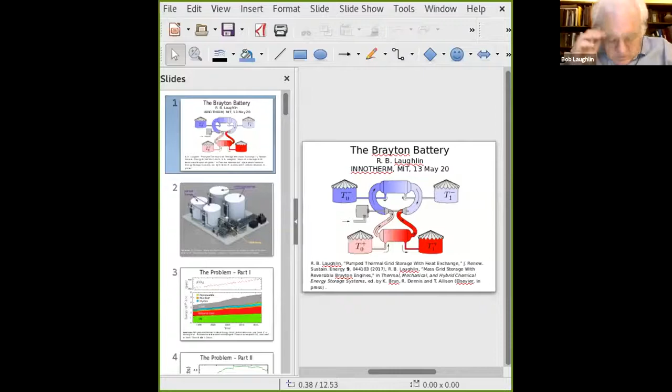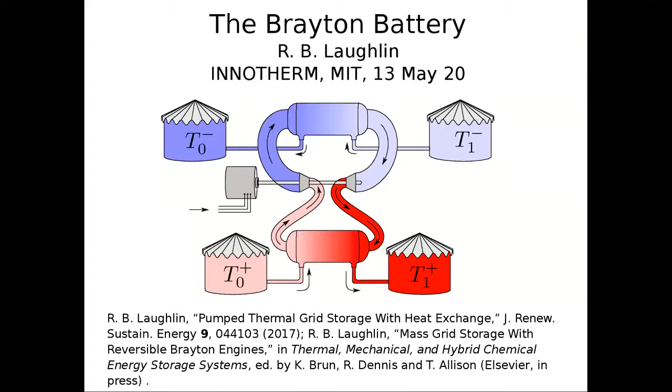Okay. So we're sharing here. Share. Okay, have we got signal? My own voice is not coming to me. So, Craig, you can communicate with me with hand signal. I can hear you. Yes. Okay. Yeah, we can hear you fine, Bob. I can't hear myself. Okay, great.

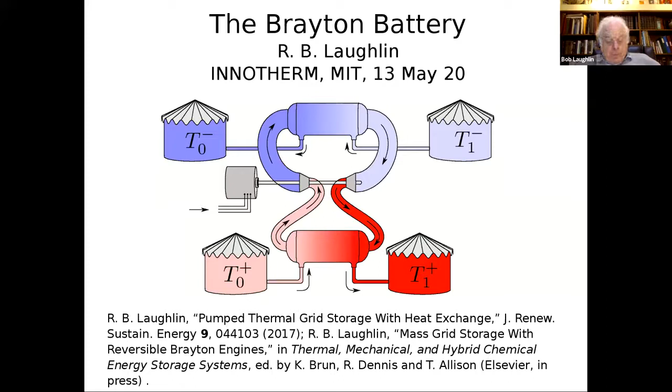So I'm going to talk to you about technological things having to do with how to store energy on the grid cheaply in enough mass to have an effect on the economics of wind. This little item is an example of what it might look like. This is drawn courtesy of Brayton Energy LLC up in New Hampshire. I don't want to talk a great deal about it other than to say first that this picture came out in 2017, which is not an accident.

And also you'll see that yellow thing says heat pump. That's the engine. And this particular version of the engine is bigger than it ought to be. So the actual engine that's doing the conversion of the energy is actually very small and is separate from whatever is storing the energy. And that separation between the engine and the storage medium is actually critical for the economics.

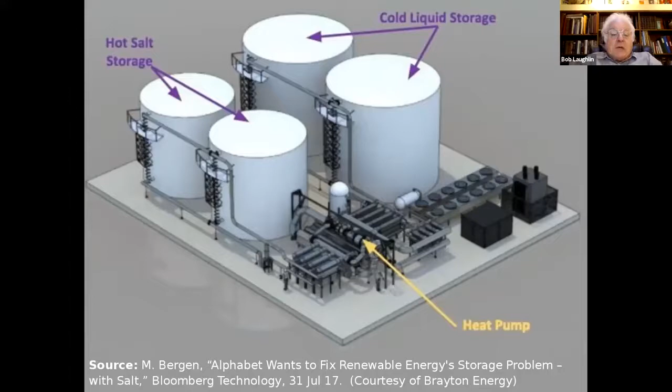Now, let's begin by talking about what I call the problem. I'd like everybody to look at the bottom figure. That is the world energy budget in joules per year as a function of time from the BP statistical review. This is converted from tons of oil equivalent by the usual factor. Here, the key things to note are first, that the total growth is monotonically upwards. Secondly, the total renewable budget is that little yellow sliver there. That's all of wind and sun. Now, plus, it turns out it also includes corn ethanol.

And that's important because the energy economics of corn ethanol is very problematic because of the diesel used in growing the corn. So actually the renewable situation is even worse than that yellow sliver shows. The renewables are growing very rapidly, about 2/3 of that yellow, but the fossil consumption is growing faster. And the total growth in the coal, natural gas, and oil actually exceeds the advances in renewable energy.

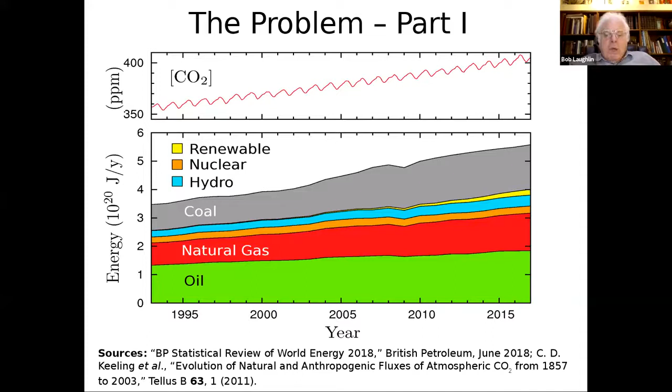So that means the Keeling curve is missing about half the carbon budget out of the Earth, and presumably that's going into the oceans, although you don't have direct proof of that. All right, so that's the energy carbon situation.

Now, we get to electricity, wind, and this is what I call the problem part 2. This is a plot of the power budget of the state of California, the California ISO, as a function of time over 24 hours on some day in 2009. What you see here are 3 curves. The gray curve down there is a prediction made 3 days ahead of what the demand will be. The red curve is a snapshot of what the demand is in real time. You see it matches the curve pretty well. And then the green curve at the top is reserves.

So the reality of electricity today is that electricity travels at the speed of light and is not storable. So power companies make their business by anticipating what demand will be and then switching on generation assets onto the grid in time to meet that demand. And that's so sensitive that they have to have extra on hand just in case their theory's wrong.

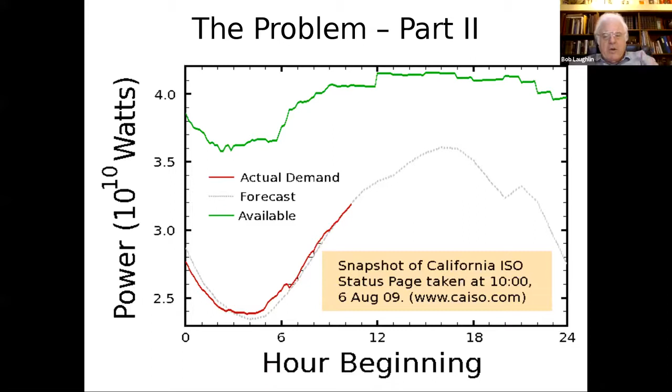Notice the magnitude of the slosh there is about 30%. Call it 50. Okay, so it's because of where 0 is on the y-axis. So what I call the diurnal surge is about 50% for the electric grid between low use in the early morning and high use at rush hour.

As a result, wind assets often have negative value. This has happened in numerous parts of the world, West Texas, parts of Europe, definitely in China. The wind energy comes when it wants, and the fundamental problem here is that the power industry is all based on time. Power that comes when you don't need it is useless to the industry because the industry is busy switching on assets to balance the load.

So negative value means that the power is worthless. It's worse than worthless. You have to pay the grid to take your power. So this is telling you that there's a business problem that's fundamental and has at its root the physical reality that electricity can't be stored.

Now you say, well, why not store it? Okay, there's a really interesting fact about the United States, which is that it has a huge amount of pumped hydro storage available, particularly in the Appalachians. And these are 2007 numbers. The amount of pumped hydro storage that you have down at the bottom, that red 0.25, is 1/4 of the amount you would need to level the entire diurnal surge load of the country.

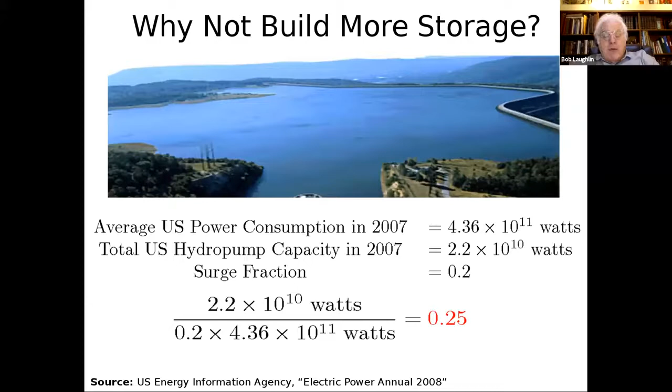So this was built chiefly in the 70s and 80s, and you might ask, well, why not build more? Clearly, if you build 1/4 of it, you could build the rest. Well, that's part of the story. One reason, the lesser important reason, is that there's a danger factor. This is a picture of the famous Taum Sauk breach, where, well, I think the picture is self-explanatory. The reservoir failed, and there was massive destruction downstream of it.

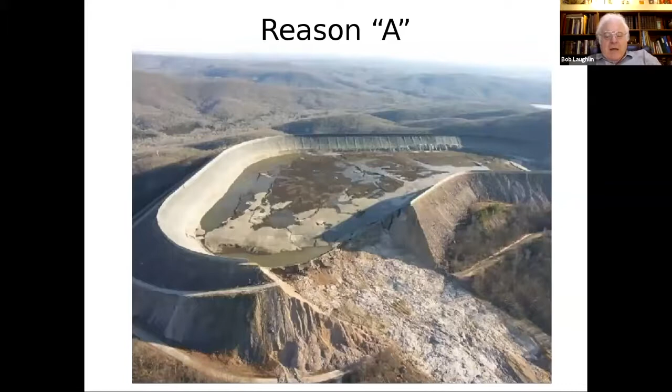But the more important lesson is that the amount of energy we are talking about storing up the surge for a metropolitan area is an immense amount of energy. It's equivalent to a really hefty sized nuclear bomb. So when you're thinking about energy storage as a safety issue, it must be physically impossible for all that energy to come out at once, or you risk destroying the city. So for example, storing all that energy in compressed air above the ground is kind of a non-starter. All it would take is one terrorist bazooka round lobbed into the middle of the tank farm and no more city.

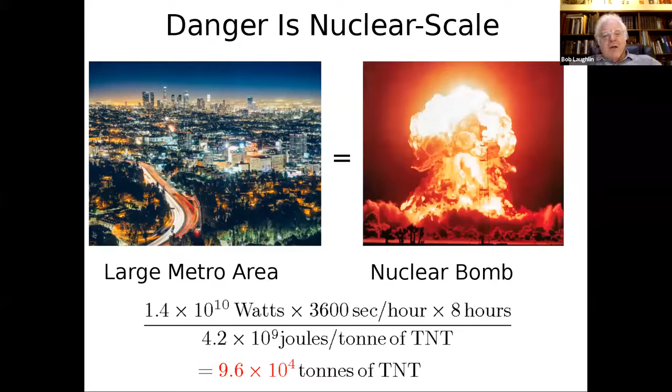The much more relevant reason is this. In the late 1980s, aeroderivative gas turbines got to be very, very good. And the power industry discovered that it could handle that surge much more readily by buying cheap simple cycle gas turbine generators, and just switching them in and out of the grid as the needs of the load required. And this is the way it's done today.

So when this technology came on board, construction of pumped hydro stopped. In other words, what stopped the construction of the remaining 3/4 of the pumped hydro that you would need to level the load is economics. Basically, the gas turbines are cheaper, and there was no hassle with the government over land, no water to deal with, and they're faster. So there's a technical/cost issue right at the breaking point of where power companies make their profits.

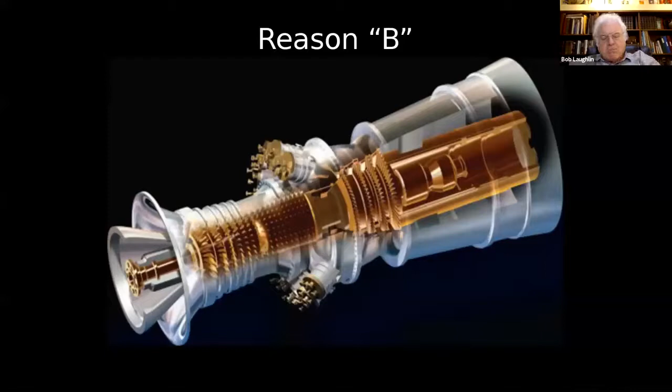Now, let's talk very specifically about those profits. Look at the bottom. This is a plot, again, for the California ISO of the total power, basically of all of California versus time over 24 hours, broken up into components. This is for a particular day. It turns out it's the 1st of April, 2019, but it doesn't matter. It typically looks this way every day.

And what you'll notice is that big yellow bulge down at the bottom, which is basically the solar fields from the Mojave. And you'll see that it's a big hunk of power. It's about 10 gigawatts. Just to put that in perspective, the average power needed by 5-county LA Metro is about 14 gigawatts. So it's a lot of power, and you'll see it rises up while the sun is shining and then dies down during the day. And then the total power use at the top, you'll see, peaks way later. It's peaking about 2000.

On this particular day, the various power utilities balance the load with the red, which is gas turbines, plus hydro imports from the Pacific Northwest. So out in California, we're near enough to Washington that we can use power lines to bring down power from Bonneville, and that's dispatchable. And the gas turbines are dispatchable. So while that's the case, you can balance the load with those things.

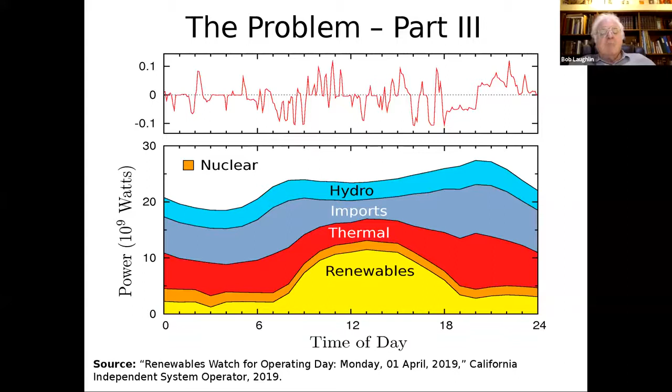Now, in order to identify this time scale, we have to go into the twilight zone. And what I mean by this is to deal with prices. And the problem there, of course, is that pricing has to do with human behavior, and you don't actually know what costs and prices are until you're in business selling things. So these numbers have very large error bars, and we could argue about them, but I have to put something, so I'm going to put these numbers.

So here we have cost in dollars per watt for the storage as a function of how many hours of storage you got. Okay? You notice right away, my thing, which I'm talking about today, is red, and it's the best. Why is that so? Because this is my graph, and I get to make whatever I want best. Now, I'll try to justify it, of course, but there's obviously a conflict of interest with regard to the red line. What I want you to look at first is the blue line.

The energy storage has two metrics. One metric is the total cost of the engine. That is to say, in the case of pumped hydro, it's the cost of the dam and the generators and the turbines. That's a fixed cost, and it doesn't depend on how much energy you store. The amount of energy you store depends on the size of the lake. And the lake can kind of expand, and there's land cost for that, but it's actually very small.

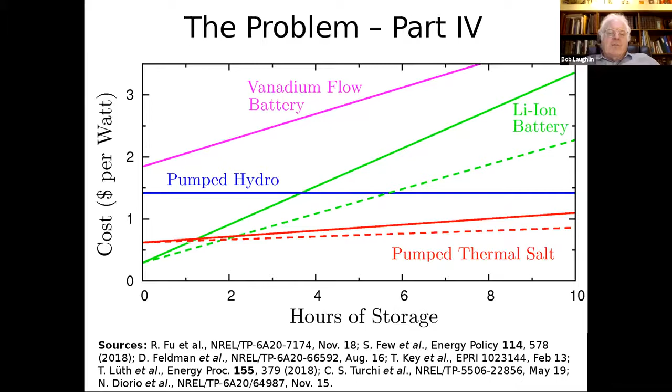Now, there's a flow battery curve up there. Flow batteries and pumped thermal storage are similar conceptually. For now, I'd like to not go down the flow battery avenue—let's just say they have cost problems having to do with the electrodes, the electrolyte, the acids, and the particular ions you're using in them and so forth. So flow batteries are a great idea, but they're kind of not ready for prime time cost-wise.

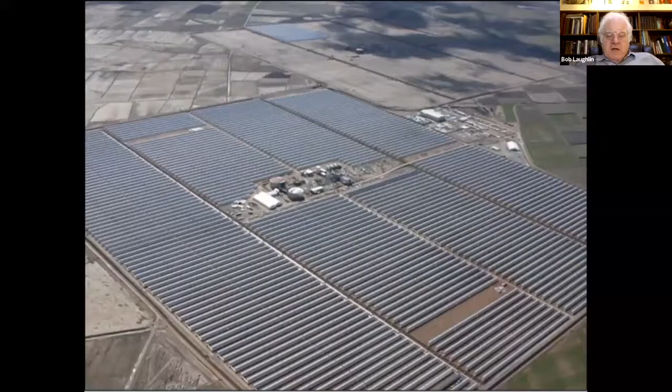Here's a close-up of it. Focus in on the center, and in particular those two brown tanks. The center is where the engine is for this solar farm. And there it is—you see in the background parabolic reflector collectors, and in the foreground there are two tanks.

These tanks are filled with molten nitrate eutectic, where heat is stored. Andasol 1 was the first commercial plant that stored energy in the form of heat, collected from parabolic fields, in molten salt. Now, this was not the first deployment of molten salt storage—that first deployment was at Solar 2 in Barstow, California, but this was the first commercial one.

And because it was commercial, there was a lot of buzz in the finance markets about what the costs were. Because of this buzz, you can go back and verify that the costs were actually remarkably reasonable. The fact that the plant was built also proves this, but let's just say there's more evidence than that, just because this was the first.

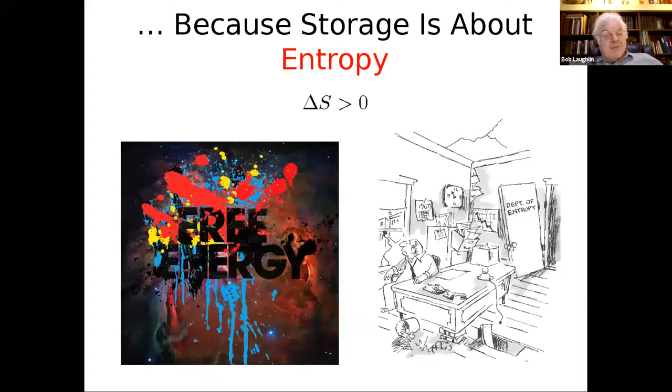Now, the key observation here is that modern gas turbine technology has become very good, and gas turbines are basically just a bunch of fans. Disregarding the burning of fuel for a moment, the actual compression and expansion that occurs in modern gas turbines is very, very efficient. They make shockingly little entropy.

And therefore, you can imagine running them backwards. Now, this is running them backwards figuratively. There are blade shape issues that you have to worry about, which I'll come back to later. But insofar as there isn't any entropy being made, you can simply run the movie backwards. So you're producing energy, you stop the projector, run it backwards, and you're storing.

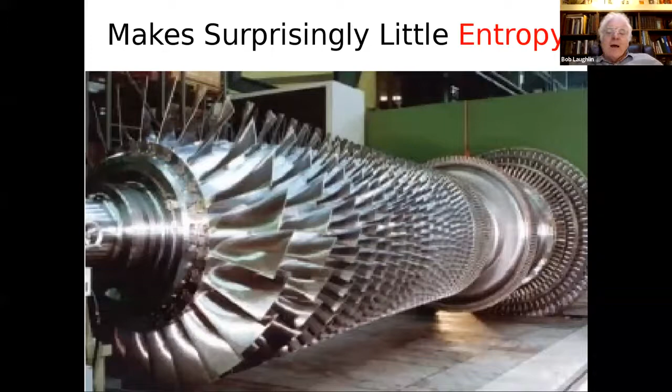Now, let me remind everybody about a few basics of gas turbines. So here you've got a jet engine, some air is coming in, there's some fire, and air is going out, and you get power out. Then you ask the question, well, how come energy is coming out? What's the difference between the compressor and the turbine? Turns out very few physicists know the answer to this, so I'll tell you.

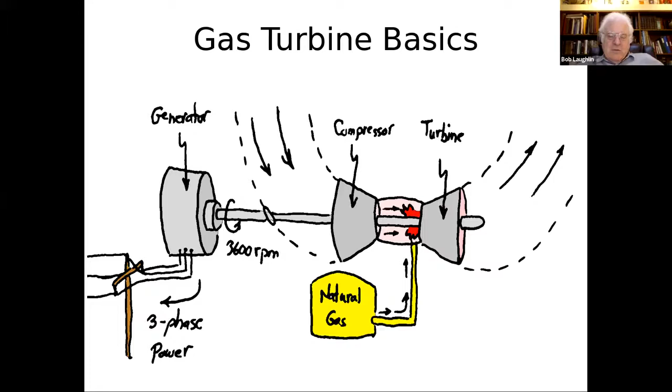It's the temperature difference. The key trick is that the temperature is much hotter at one end of the chamber than the other, and the work done in the turbo machinery is P dV. It's the dV, the volume is different on the two sides. So the trick is you keep the temperature unbalanced, and then maintain that temperature imbalance with a stupendous flow of moles of gas through the turbine.

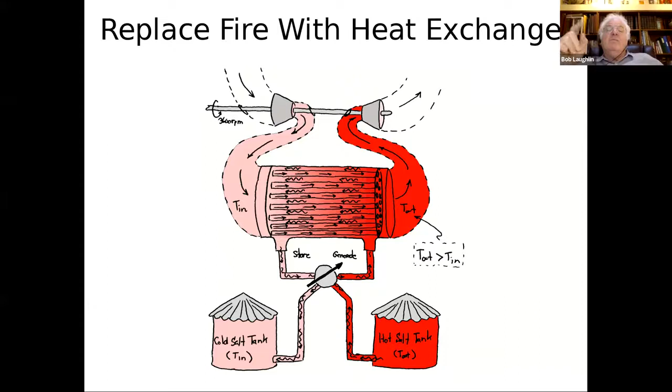Now let's advance a little bit and get rid of that, and put instead the moral equivalent of a locomotive boiler in there, then do exchange with some sort of heat fluid. As far as the turbines are concerned, nothing has changed, they work exactly the same way. But now you have heat being transferred inside a heat exchanger such that the temperature difference over which it's transferred is very small. And if you do that properly, you can cause the amount of entropy made to be very small.

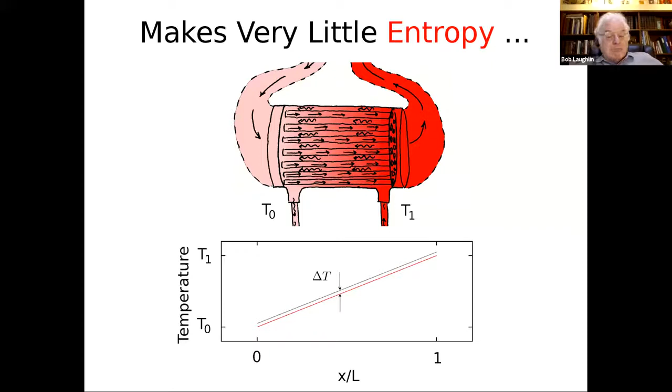So now here's the engine. Let's just do it twice, copy it, have a high pressure side and a low pressure side. So we're doing the same thing a gas turbine does, but now it's all done with external combustion, but it's not combustion at all. It's just stashing of heat in heat media.

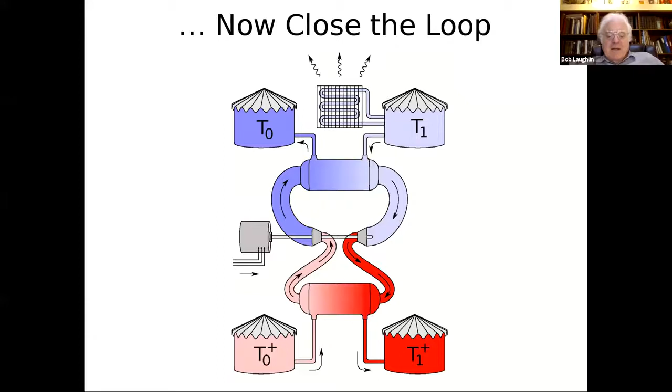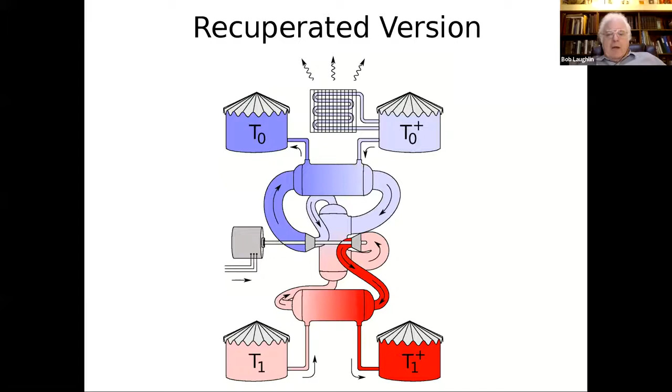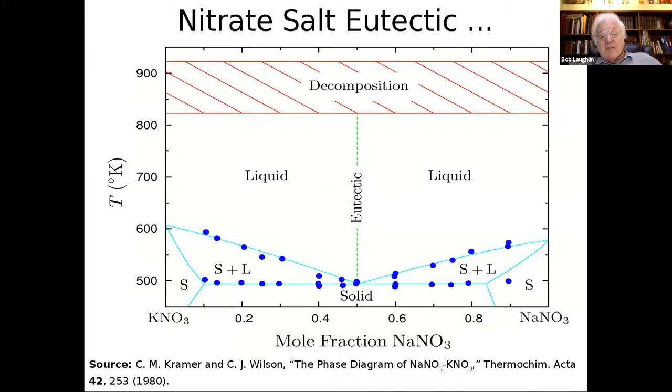And it turns out that temperature range is large enough that phase transitions don't matter. In other words, equipartition is guaranteeing that the amount of heat stored per atom is very large. In fact, you don't want phase transitions to occur here because they're entropy makers. So this is an application where phase transitions in the medium would actually be bad.

This temperature range turns out to coincide exactly with what's called the creep cliff of the steels in question. This means there's a fundamental compatibility with the engines. This compatibility is also manifested in modern day supercritical steam plants, which is why they have the temperature ranges they do. So the temperature scales of these salts turn out to be just perfectly adjusted for cheapness and compatibility with materials.

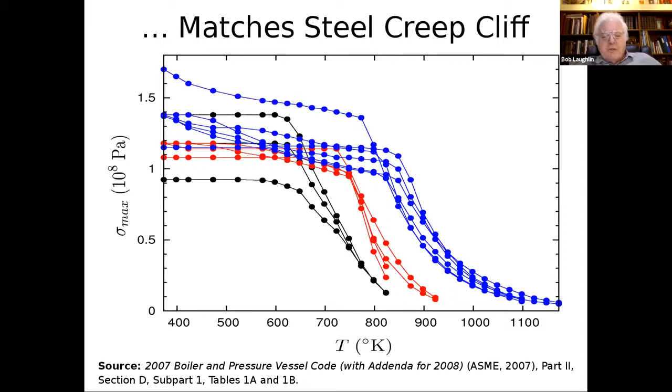The actual cycle isn't adiabatic, of course, it's non-adiabatic, so the compression ratio has to be slightly different in charge and discharge, and you have to get rid of some of the heat.

Okay, so with the extant gas turbine blade technology that one has today, we're talking about an asymptotic round trip efficiency about 0.7. That is enough to make money.

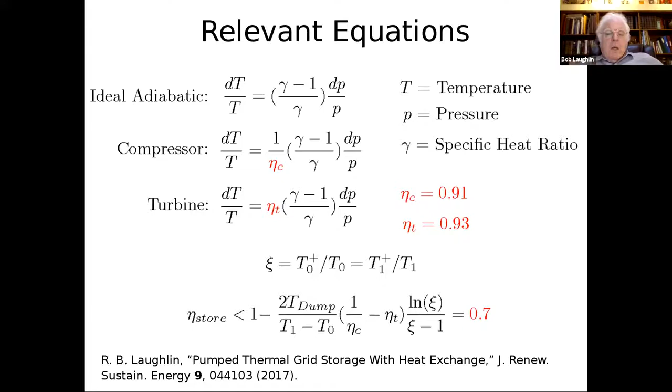Now, closed cycle gas turbines are not new. The first one ever was actually built on the eve of World War II in Zurich. The only truly new thing is the idea of running it backwards as energy storage. So lots and lots is known about this, and this particular engine is the progenitor of what we now call supercritical CO2 technology.

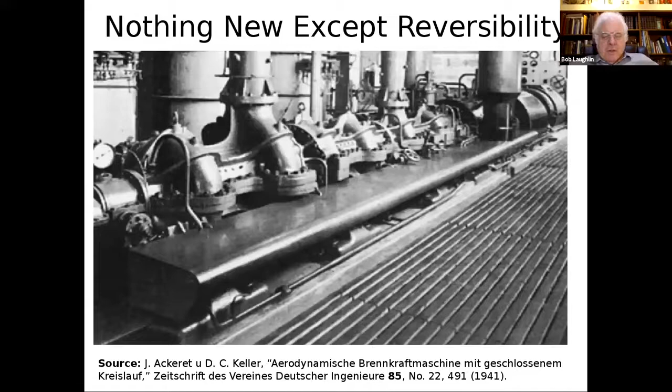Now, given that the darn thing is a money problem, what you as a technologist have to do is learn a whole lot about money and legalities. Politics too, but money and legalities.

So the aftermath of all this thought that I just described to you is a whole bunch of patents. These are the ones that have been granted, and there are others. The reason you have to do this is because when you have a money problem, the people with the money have to put their money down on the table to get things to happen. And they can't do that unless they're protected. So you ask, what do you have to do to solve this problem? Well, what you have to do is get a whole mess of patents, so the money people can put their money down.

So this particular technology I am banking on, because it does what you need with the efficiency you need, with the economics you need. So we don't have a siting problem. You don't have to put the compressed air underground in caverns.

Why? Well, because this technology is compressed air energy storage, except you do a secondary expansion first, so you don't have to put the compressed air underground. And anyway, we all know when you compress a gas, the energy is actually stored in its heat. So there are heat issues with that case that you just get rid of when you don't have the underground cavern.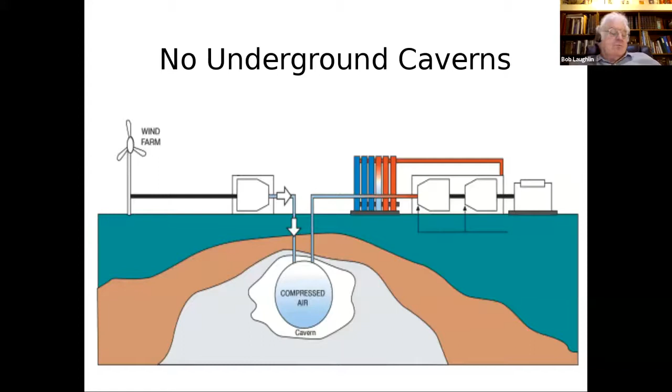Because everything is at 1 bar, explosion is physically impossible. So the atomic bomb danger of energy is gone.

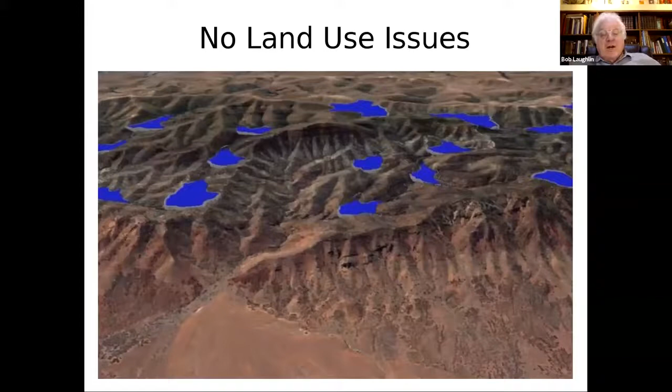All the problem of using public lands goes away because you don't have to make lakes. The footprint of the technology is quite small.

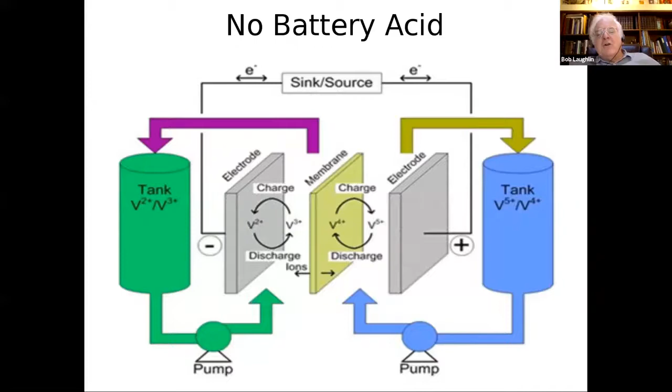Environmentally, you're in good shape. You don't have any pH2 stuff in giant tanks. You have just a bunch of salt, and if there's a breach, what happens is fertilizer goes all over the ground. And finally, no semiconductors.

So as I said, I'm a semiconductor man, and I understand the physics of what's going on with the grid well enough that I know that you don't want semiconductors. The grid is set up for mechanical motion, like these horses, except it's electrical mechanical motion. And so faking it with semiconductors is actually bad and results in losses. So we get rid of the semiconductors and we're back to good old mechanical grid.

We're done, and I'm on time, everybody. Thank you for your patience. I hope you were entertained.

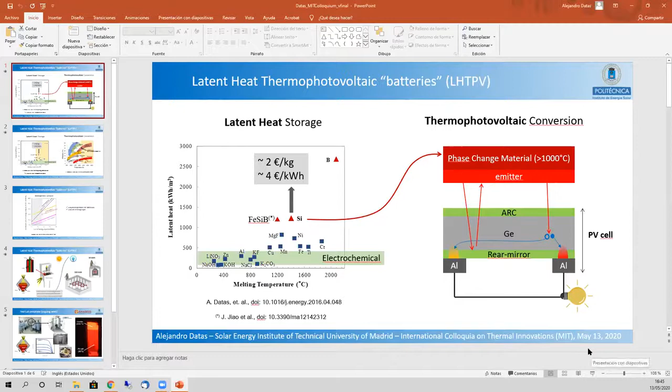Thank you very much for the introduction. I will briefly, in just 5 minutes, introduce this concept of what I call the latent heat thermophotovoltaic battery. As the name says, it has mainly two parts: latent heat storage and thermophotovoltaic conversion.

For the storage part, I want to emphasize the role of phase change material, which basically stores energy when it changes from solid to liquid phase. Here I show the latent heat of these materials as a function of melting temperature. You want a high latent heat because this means high energy density capacity. Generally, when you increase the melting temperature, you also increase the latent heat, so the energy density capacity.

With some exceptional cases, like silicon or boron, or even this new phase change material that is an alloy of iron, silicon, and boron, they provide remarkably high latent heats—basically twice the energy density of electrochemical batteries, illustrated by this bar. Besides that, you have a very low cost because this is just metals. In the case of silicon, you have about two euros per kilogram, which translates to €4 per kilowatt hour. So it's really a good way of storing energy.

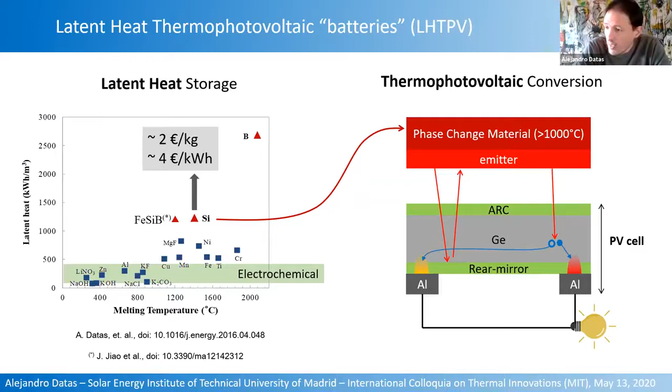But still, 30% could sound like a very small value if you compare it with electrochemical batteries. So the question is: is this efficiency good enough for making electricity storage, for instance?

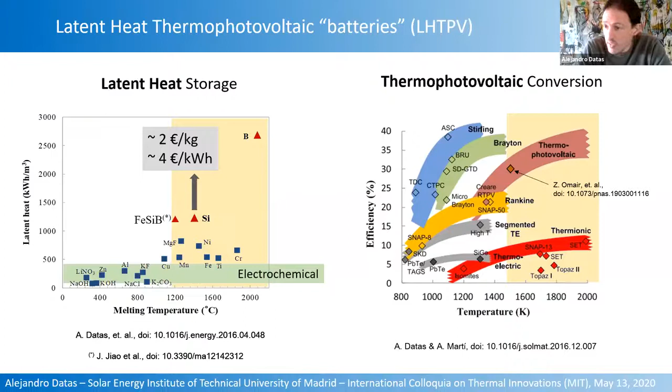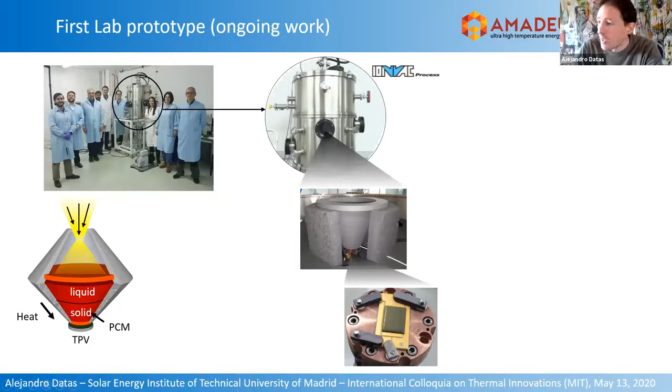I will just show some details of our attempts to make this in practice. This is an illustration of one of the embodiments and the prototype we have just built. You can see here the crucible, and here the photovoltaic cell - this is a gallium antimonide cell, just underneath the crucible. Here is an example of the system in operation with a hot crucible radiating to the photovoltaic cell.

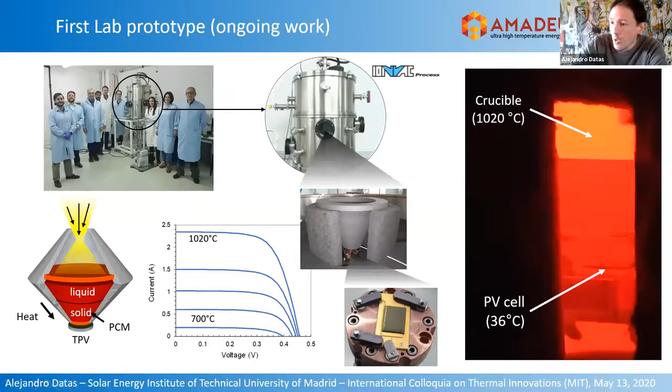This work has been done during the last 3 years in the frame of the European Amadeus project. One of the outcomes of this project was a workshop organized last year in November, where we invited other participants - people from MIT, 1414, and Antora, who are also in this Colloquia. An outcome of this workshop, if you are interested, will be collected in a book released in September 2020, so you will have more details on all this work there.

That's all from my side.

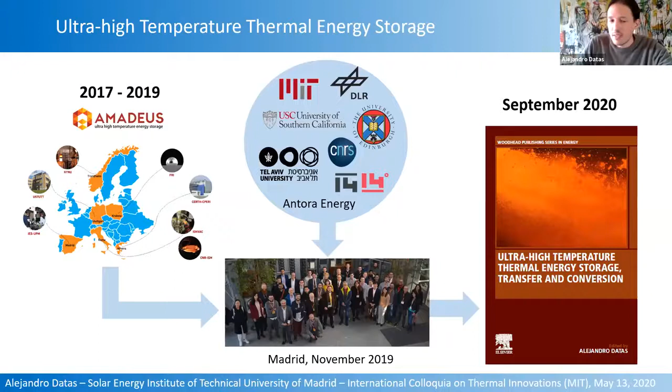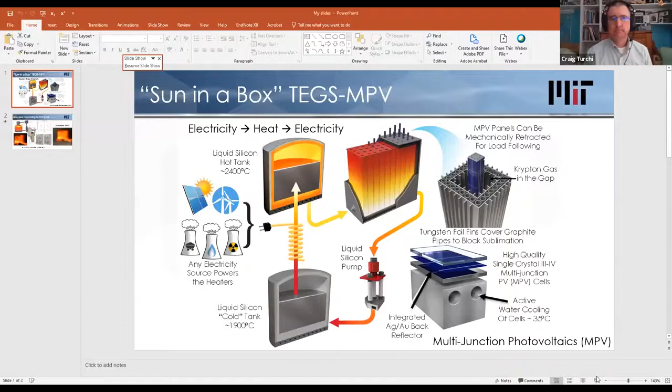This is just a quick cartoon overview of the embodiment my group is pursuing. In short, we take in electricity agnostically from essentially any source. We are in the regime where we're trying to push the temperature limit, so you can imagine an entire infrastructure shrouded in an inert gas - everything stays in an argon atmosphere, which opens up the materials options for which you can use.

So we are using an essentially all graphite infrastructure that allows us to go to extremely high temperatures. We're essentially doing 2-tank thermal storage, but our low temperature is actually like 1900 degrees C - our quote unquote low temperature - and the high temperature is like 2400 degrees C.

So we take electricity off the grid, heat up the medium. In our case it's actually liquid silicon, similar to Alejandro's case, but instead of using a phase change, we're using it as a sensible heat medium, stretching it over a delta T of about 500 degrees C. We heat up the liquid silicon, store it in a hot tank, and then when power is desired, run that through a heat engine, which again, similar to Alejandro's case, is photovoltaic cells.

So instead of trying to run turbo machinery at these temperatures, which would be exceedingly difficult, instead we go so hot that we can actually just convert the light off of the piping infrastructure itself.

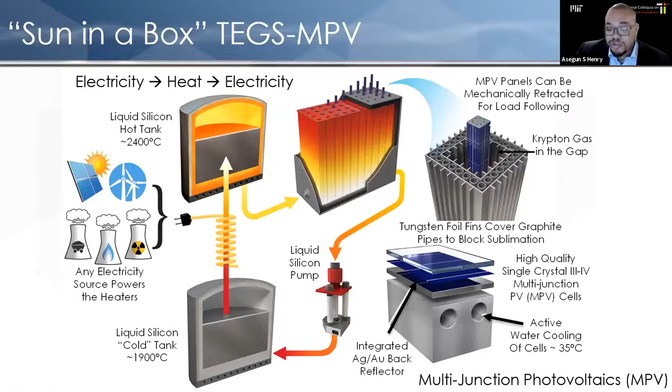These cells, of course, are made in a very different way than normal PV cells. These are cells that have a mirror on the back, so the majority of the light we don't even attempt to convert. We only focus on the photons we can convert very efficiently. That allows us to get the overall system efficiency higher, and all the light that is not converted bounces off this mirror and goes back into the infrastructure, keeping and retaining that energy inside so we don't lose it.

One of the biggest contributors to us pursuing this approach has been a significant breakthrough specifically on moving that fluid. We've managed to figure out how to pump liquid metals at extremely high temperatures. This is a small excerpt from a video from a paper we published in Nature a couple of years ago, where we pumped liquid tin at about 1350 C. We have now pumped silicon above 1900 degrees C as well - papers on that are forthcoming. But basically, we can now move liquids at extremely high temperatures, which allows us to do new and interesting things, and this particular energy storage system is one of them that we're very interested in pursuing.

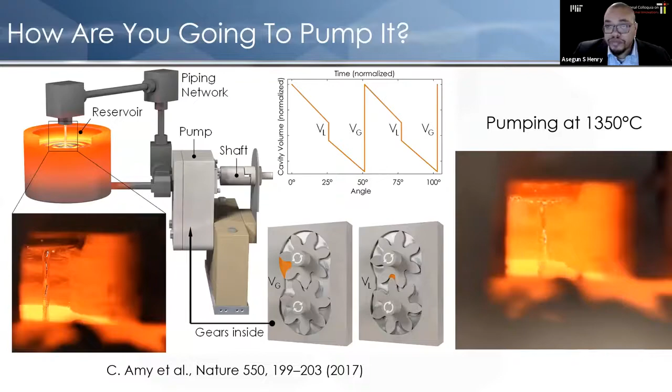Craig, you're on mute. Thank you. I missed the click.

Give Mahesh a chance to weigh in on the work that they're doing in Australia with 1414 Degrees.

Can you see my screen, Craig? Yes. Perfect. Thanks very much for the introduction earlier, Craig.

And I'd like to especially thank Professor Laughlin for the great presentation. He's explained the problem in very great detail and in a very exquisite way, all the problems with the negative pricing events on the grid, need for the storage as renewables penetration increases, etc. And also why thermal storage is a very attractive option. So my job has become much easier.

So I'd like to take a slight segue from there, because right now we've only been focusing on using these thermal batteries as an intermediate for storing electricity. But if you look at any country's energy landscape, here's an example for Australia, about 50% of the industrial energy usage is actually in the form of process heat. And interestingly enough, close to 40% of that process heat industry is for greater than 800 degrees C.

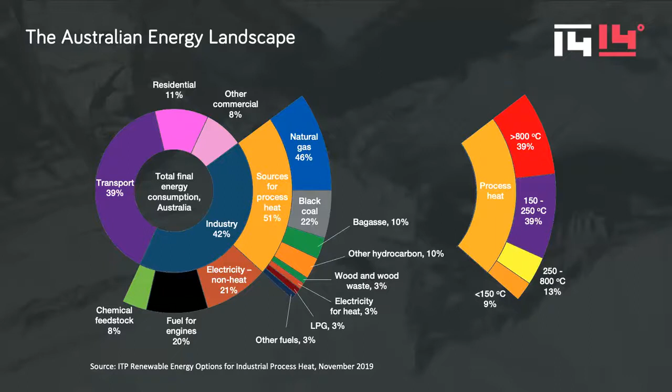And that's where I want to couple with the presentations from earlier, because we want to store heat at higher temperatures, but if we store it at high enough temperatures, we could use it as a mechanism for providing this green process heat as well. So what we're trying to do is quite simple. The 1414 TESS box that you see on the left side over here, that's our energy storage unit. We use phase change in metallic alloys, which are based on silicon. These have melting points between roughly 1000 to 1400 degrees C.

And as Alejandro showed, the storage density of these materials based on silicon is quite attractive, and much higher than electrochemical systems can get. We are agnostic to how we charge this thermal storage system. In the two demonstrator units that we have, we've shown we can charge it with ohmic resistance from grid electricity, or it can be done using biogas as well.

So our second demonstrator unit is installed in a wastewater treatment plant, which produces biogas, and that's used to heat our TESS system. And that heat is basically an energy cascading system, which can provide heat at ultra high, medium, or low temperatures, which can then be converted into electricity by running a gas turbine or a combined cycle, or can provide process heat.

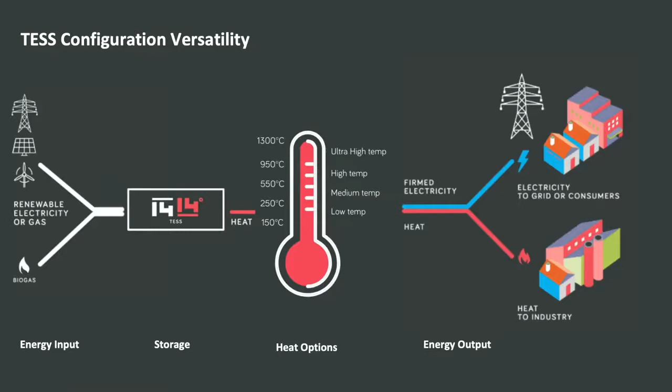So some examples of process heat applications that we're aiming for are the ultra high temperature processes, like hydrogen production using thermochemical routes, iron and steel, the cement and alumina industries. In the medium temperature region is where we run our gas turbine or combined cycle. And at the low temperature end of the spectrum, there's a lot of process heat need in the pulp and paper, food, brewery industry, etc. So that's the sort of energy cascade that we are looking at.

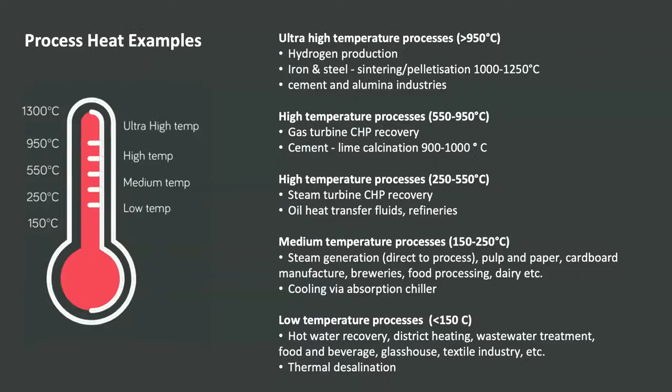What we're trying to do differently from what has been done before is that mostly the heat recovery systems for these power plants were aimed at the bottom end of the spectrum. We want to do it where it is more exergetically attractive. That's all I have. Thank you.

Thank you, Mahesh. John, our final panelist today is Andrew Ponec, and we've heard about some of the high temperature storage opportunities. Andrew's going to talk about a little bit different range, I believe. Absolutely. Thanks. I do have the benefit of going last, since everyone else has described many aspects of this system quite well. So I just have a single slide to go through what the team at Antora Energy is commercializing.

And this has some similarities to what Alejandro and Asegun presented on. It's a thermal energy storage system using thermophotovoltaic cells as the engine to convert that heat back into electricity. The main difference is that we've heard descriptions of how to store the energy in sensible heat of a liquid, for example in molten silicon, or in the phase change between a liquid and solid. Antora is commercializing an all-solid system.

So we use simply solid carbon, which has some of the benefits of very low materials cost and high energy density that Alejandro mentioned. But it does have the advantage that without a phase change, you have some simpler things on the system side.

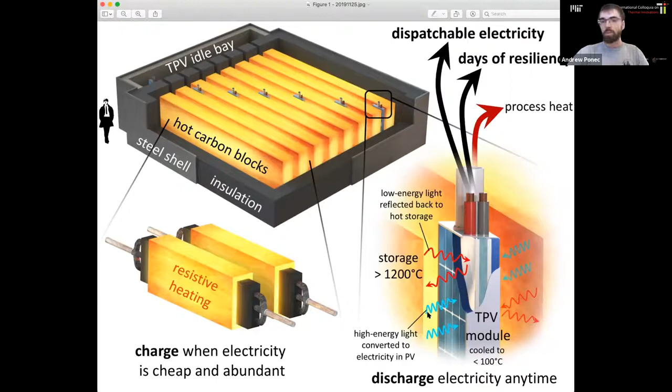Again, it's direct ohmic heating of the carbon as the charging process and a thermophotovoltaic cell as the discharge process. One of the things that Bob mentioned was limiting entropy. I think Malta, or Bob's system, does a very good job of limiting entropy by using a heat pump. Another way to limit the entropy generation in the system is to store the heat at such a high temperature that the conversion from electricity directly into high temperature heat is actually not generating that much entropy. So this is what Antora is commercializing. That's all I've got.